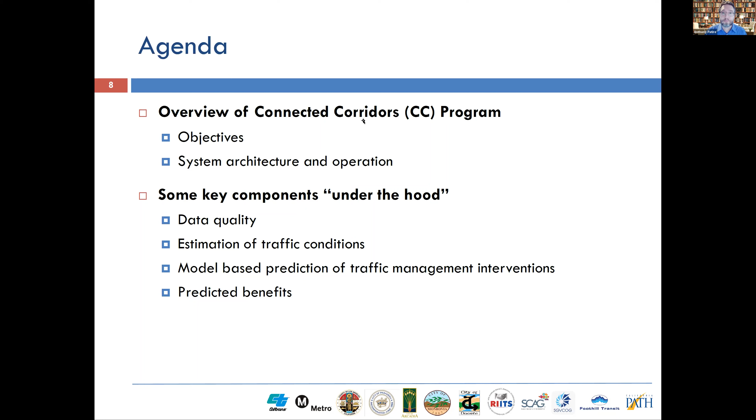Okay, so first let's have an overview. This is a satellite image of the LA basin. Now, unfortunately, we're not yet sophisticated enough to manage all of this traffic, so we're focusing just on the network shown in blue.

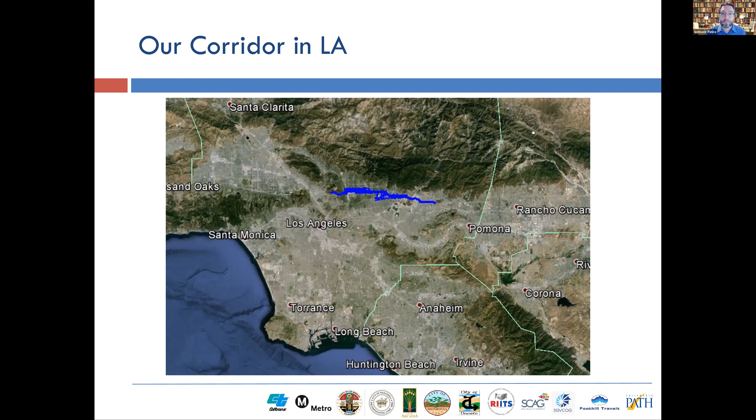If I zoom in, our corridor extends about 16 miles east and west, and about 4 miles north and south. It includes the cities of Pasadena, Arcadia, Monrovia, and Duarte. The supporting arterials, drawn in thick colors, are in play to help support freeway operations.

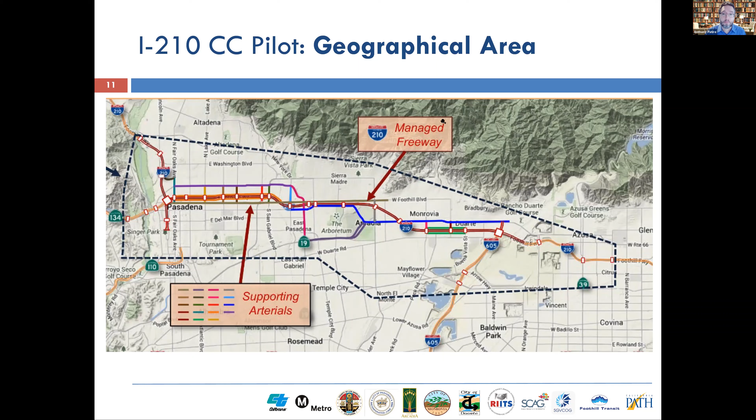So, a few key objectives. Of course, we need to bring together our corridor stakeholders to create an environment for mutual cooperation and collaboration. We're developing and piloting an advanced ICM IT system for use by Caltrans and local stakeholders to manage their corridor.

Our sincere hope is that this is something that will be replicable, and that what we're building is useful enough that it can be fanned out across other corridors. We hope to demonstrate project effectiveness that will lead to more opportunities to try out more advanced tools and more capabilities.

And the last bullet I put in a different color, because really I'm going to be focusing here on increasing capacity on arterial reroutes during freeway incidents. Our initial focus is not dealing with recurrent traffic, but only freeway incidents, and modifying signal plans, ramp metering plans, and route messaging on the fly.

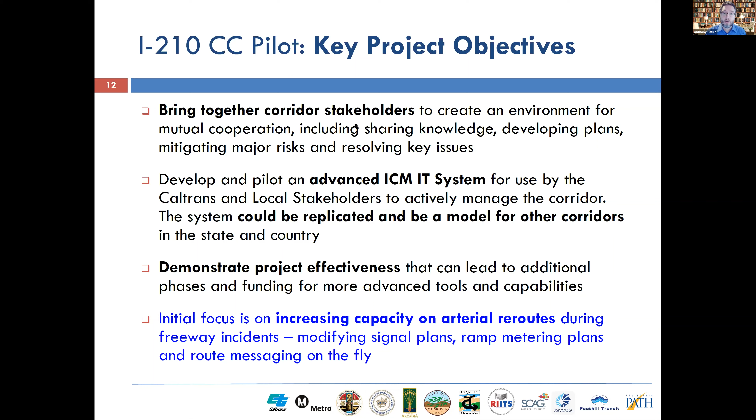So you always need a good motivation slide. In this traffic accident in 2014, one big rig ended up in the Gold Line transit tracks that run in the median of the freeway on our corridor. This incident is now memorialized in Google Earth as a bad day for commuters and a glorious day for traffic researchers who can now obtain a direct measurement of freeway jam density.

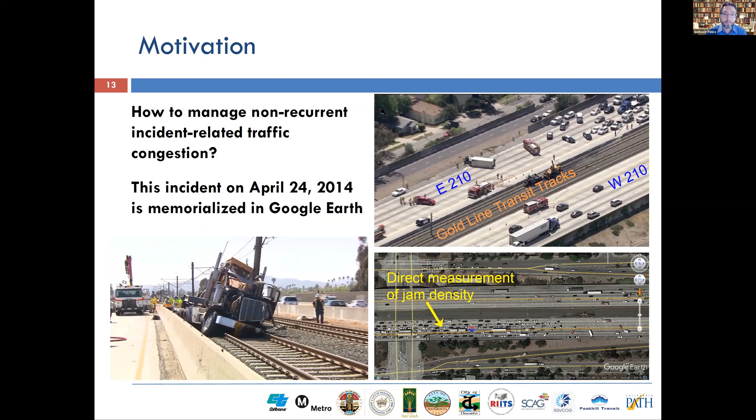Sensationally disruptive events happen from year to year on the I-210 corridor. For example, a big rig ends up blocking the Gold Line rail about once every two years. The picture in the upper right shows a complete freeway shutdown resulting from a suspicious package that was discarded from the transit terminal and landed on the HOV lane. They had to send out a robot to go check it out and make sure that it wasn't a bomb.

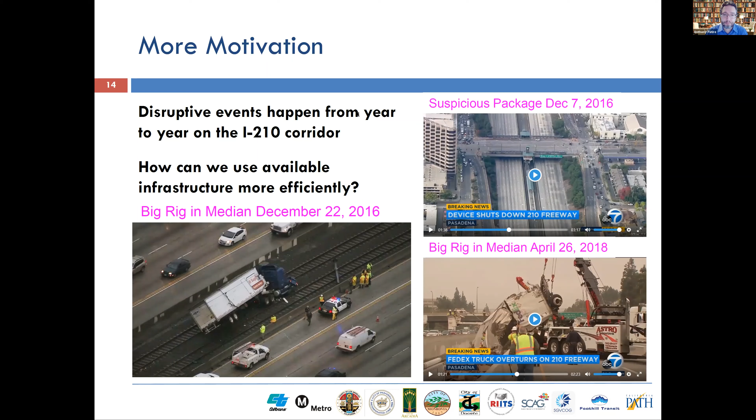So this slide is a cartoon depicting some ideas of how one might manage an incident. The concept is to adjust traffic signal plans and to provide extra capacity on a parallel arterial or two to help address some of the demand that cannot be served by the freeway when it's blocked. As you can imagine, this is a great example of a cyber physical system. You have people, you have infrastructure, you have the technology that's trying to help make some good decisions to manage the system more effectively.

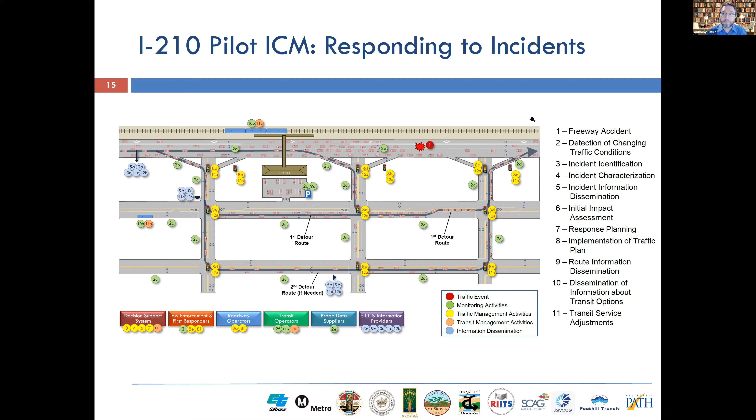So for the response plans that we're considering in this corridor, they can involve a number of different elements. It can include the reroute itself, information dissemination via changeable message signs or trailblazer signs along the routes, intersection signal control request, adjusting the cycle duration and offset of the signal to provide additional green time to preferred movement, and also ramp meter control requests to prioritize vehicles entering the freeway at the end of a reroute.

Or maybe if this is an incident happening 2 a.m. on a weekend, no fatalities, no chemical spill, nothing crazy - well, lucky day - maybe there's no need for a detour. It's just that the management agency should do what it normally does and send out a team to clear the incident.

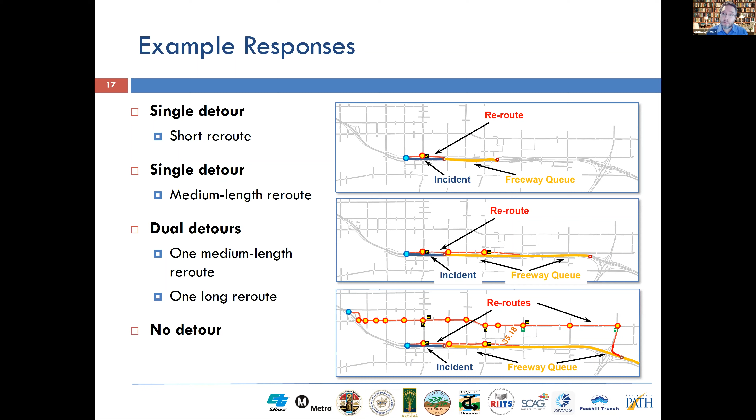Okay, so I'm going to talk a little bit about the system architecture that we're building to help manage this cyber-physical system.

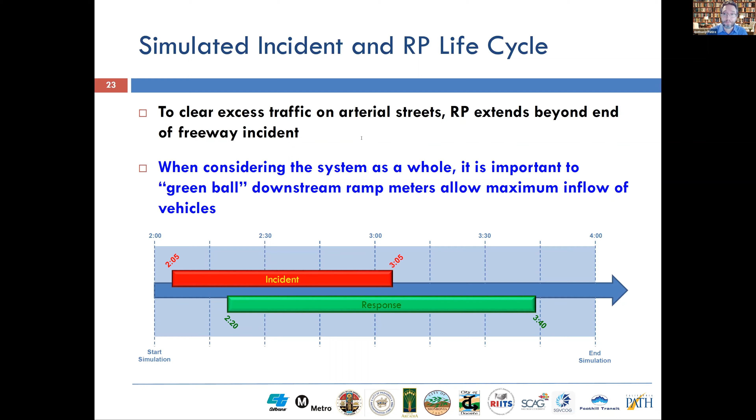So the decision-making process looks like this. Plans are pre-scored based on traffic engineering judgment, the results of simulation studies, and stakeholder preferences. In addition, the rules take into consideration the incident attributes, for example, the location, the time of day, the number of lanes blocked, the historical demand and the queue forecast, asset availability, for example, can I even control that signalized intersection, or is communication down?

Estimation results for the queue length and initial state, and the prediction scorecard. I'll explain about some of these things later. If there's a data outage, then estimation and prediction become impossible, and all that you can do is rely on your pre-scored plans. If there's some kind of communications outage, it could be that you have no assets to control, and you can't even deploy a response plan.

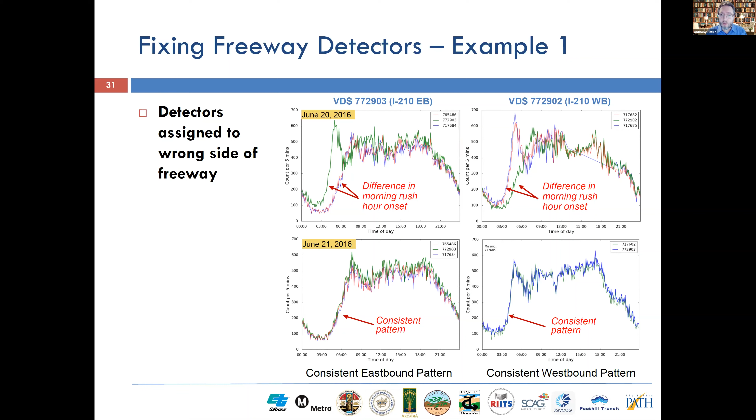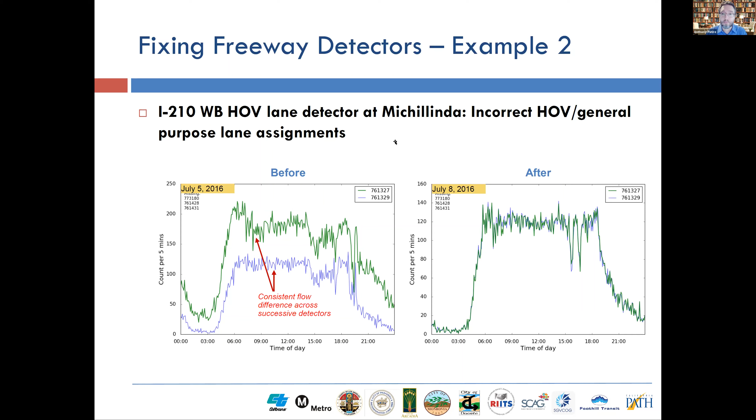During the IP conversion, what would happen is that these green sensors would go dark, and then sometime later they would light up in orange. At first I doubted our own dashboard - I'm like, really, this can't possibly be right. We fixed the configuration data, but why should this change? They're just updating the communications. But when we examined the data, it turned out that the configuration needed to be fixed again.

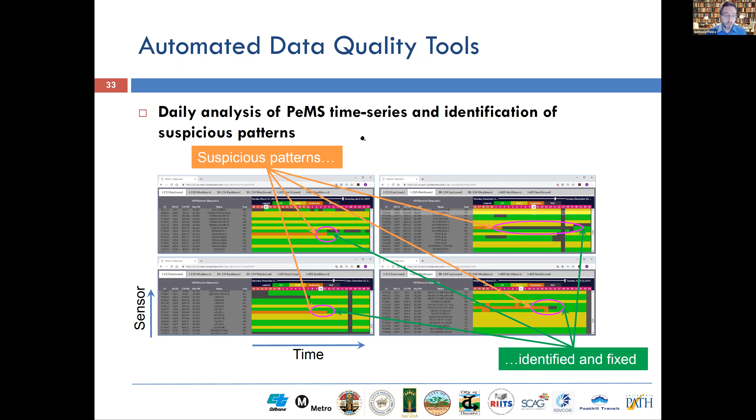So there's some lessons learned about data. I've seen graduate students waste a great deal of time taking the data as given, and it sort of doesn't quite work out with the math. I think it's really crucial to think critically about the data in addition to thinking rigorously. You can't just take the data as a given. In a live system, sensors can come and go underneath your feet. Don't underestimate the utility of automated tools and dashboards to check configuration, information, and data quality. In an increasingly data-driven world, methods for handling missing and erroneous data will only become more important. One thing that we've worked on, which is really fun, is looking at some of the patterns that we found in HOV data and different types of data, and trying to apply that more broadly.

I want to attribute this work to Kijun Gan. This work is an important part of connected corridors because it fulfills a critical function. For detailed questions, I'll refer you to the report, but I just want to provide an overview of how we're estimating arterial traffic.

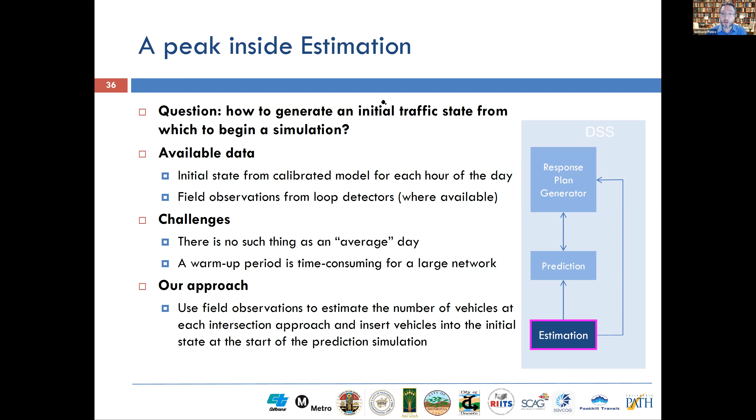Regime 1 is the uncongested regime. Regime 2 is congestion but with no downstream spillback. And Regime 3 is congestion with spillback.

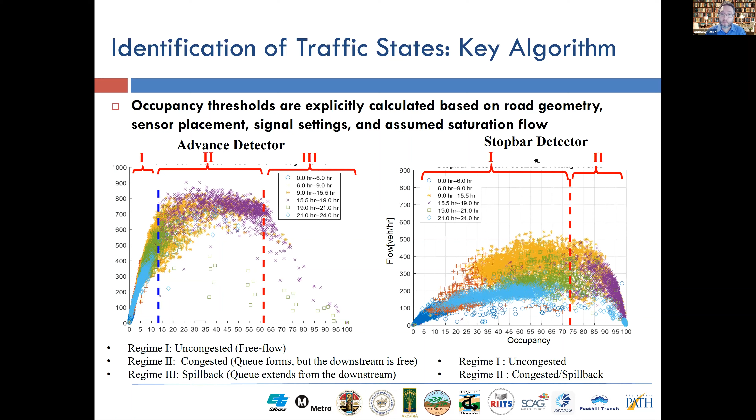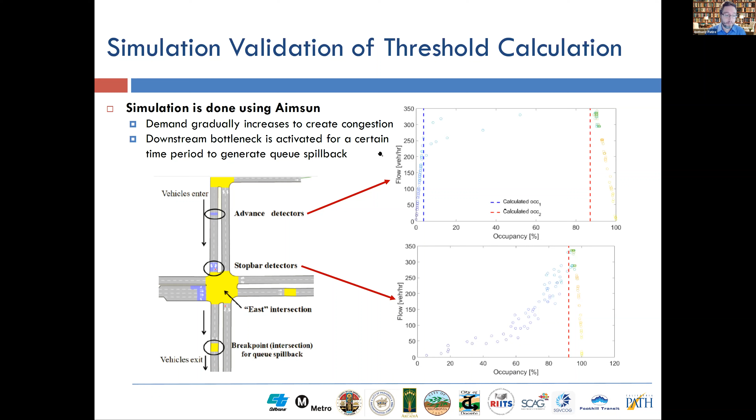It was necessary to validate the queue estimates in real life, and it turns out there's a linear relationship between travel time and total queue along an arterial in the congested regime. The picture at the bottom shows the test site on our corridor where both Bluetooth travel time and loop data were available for comparison, and luckily, in the afternoon and morning peaks, it's in congestion, so we were able to test this out.

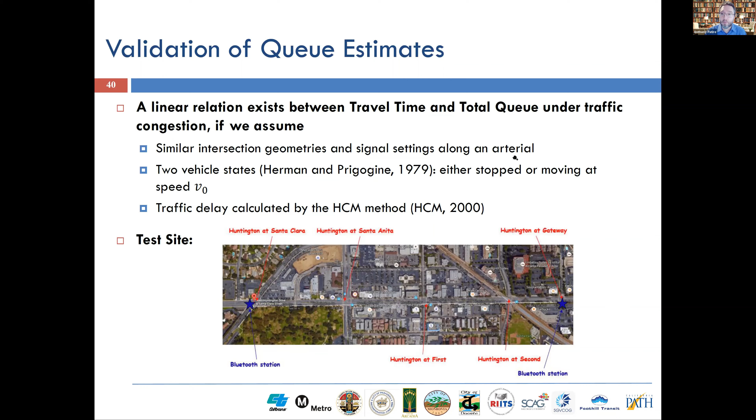This slide shows a part of the Aimsun network in the lower left, and on the upper right, a zoomed-in portion of the network in which vehicles generated from field detector measurements are inserted into the initial state.

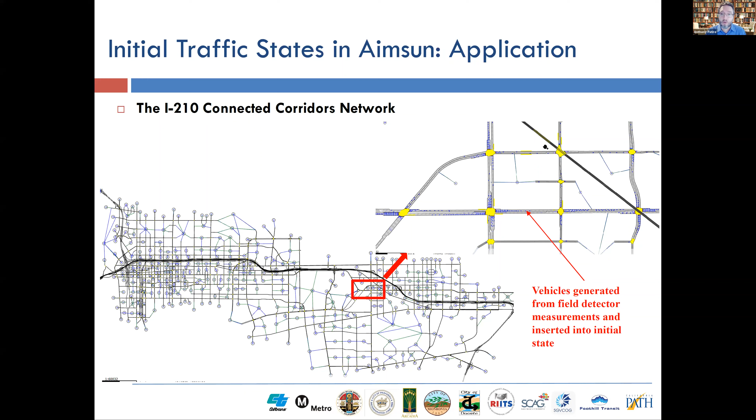Now there's one last piece of information you're probably wondering about: if we insert vehicles into a microsimulation, how do we give them destinations? That's really important. From simulation of the calibrated model, we obtain a destination distribution for each time period and day type at each intersection approach. This has limitations and we're working to improve it, but it gives us a starting point.

Given that destination distribution and the sensor data, we determine the number of vehicles in each queue at each intersection approach. We assign an appropriate destination based on that distribution, and then assign the vehicles from downstream to upstream. When a dedicated lane is full, say for a left turn, vehicles are assigned to adjacent lanes.

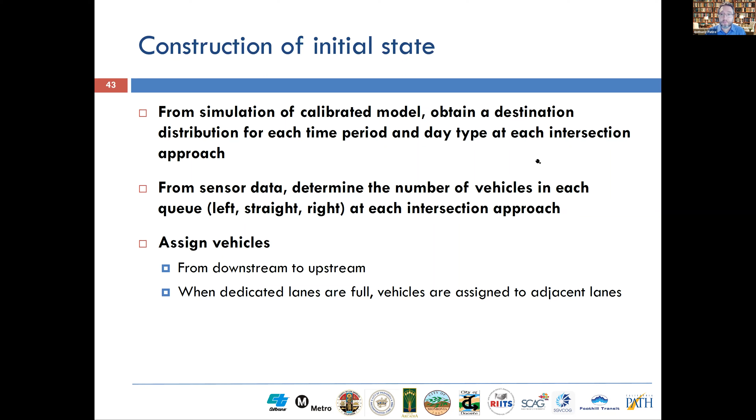Okay, so this is my third topic. I'm going to talk a little bit about prediction.

Okay, so first let's just take a step back and talk about modeling. What's the purpose of a model?

At the beginning of this Connected Corridors project, we needed to understand how to manage incidents on the I-210 corridor. We needed to take into account short-term traveler responses, such as en route diversion, triggered by unusual congestion or information dissemination. We use the model to help guide assembly and selection of appropriate response plans, try out different control parameters for the signal plans, and see if these things work.

It was really important to be able to use the model to communicate with stakeholders about what they thought was going to work or what wasn't going to work, and whether they believe that we're understanding the problems on the corridor.

So what's the purpose of the model in real time? We're trying to do some kind of model predictive control where we're able to forecast the possible evolution of the incident under different control scenarios, to facilitate computation of a performance scorecard. I'll talk more about the scorecard later. We need to provide enough fidelity to decide among available options.

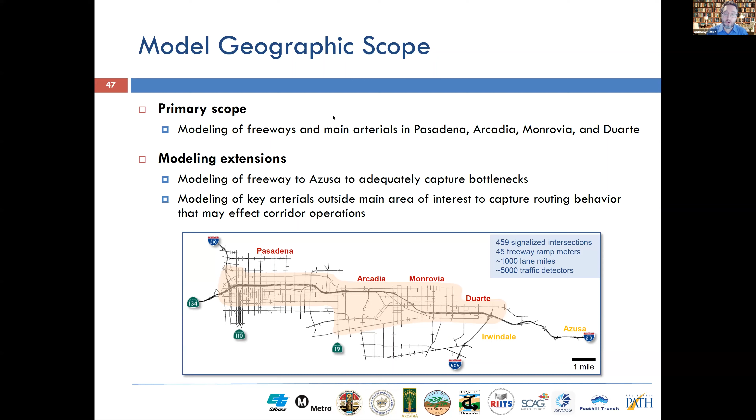The model extends beyond the main corridor that's being managed, because we needed to accurately capture some bottlenecks outside of that area. We also needed to model some key arterials outside of the main area of interest to capture routing behavior that may affect corridor operations.

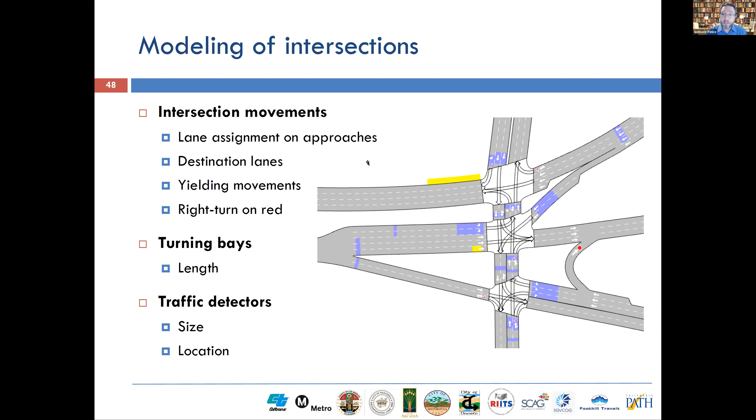We model some complicated intersections in great detail. We programmed in all of the signal timing plans for 24/7 operation. One of the things that pushed us toward microsimulation was the operation of the corridor. 98% of these intersections are actuated, and these actuations impact the minimum green and the extension of the green phase, so we really wanted to make sure we were able to model that.

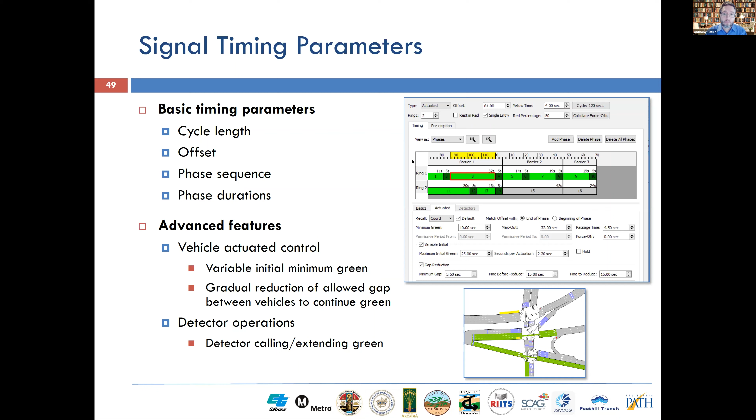This is actually a really interesting discussion - why choose microsimulation over flow-based or meso models or other types of models out there? For the controls within our toolbox, the intersection and signal ramp meter changes are the key components of the response plans, and that's how we're able to provide additional capacity for needed movements.

The intersection signal behavior depends on these vehicle actuations, and the microsimulation directly models these actuations. Changes in routing behavior resulting from the incident and from the response plan are key factors in the predicted outcome. You have to calibrate an OD matrix, which is a lot of work, but having this OD-based model helps you evaluate these routing impacts.

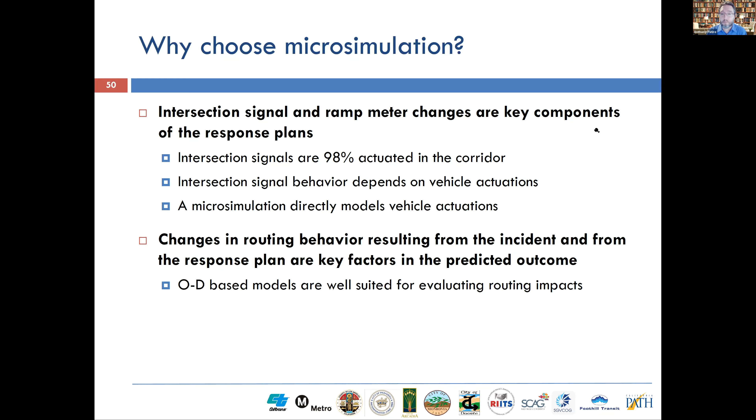Okay, so I want to get under the hood a little bit and give you a show and tell of the analysis that the DSS performs behind the scenes. We're going to talk about what's happening in some of these green areas between the response plan generator and the prediction.

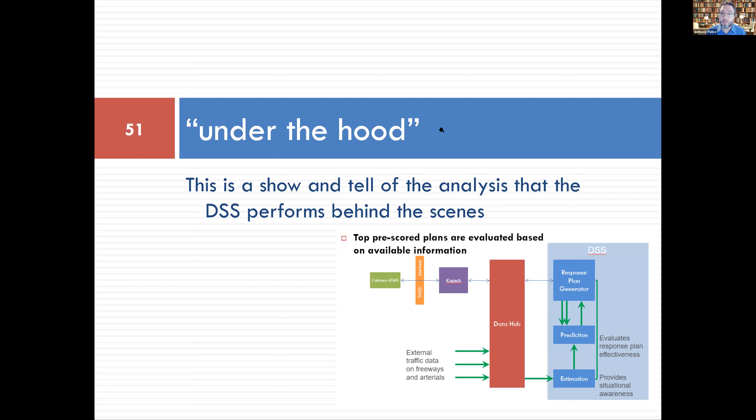So here's an incident that we can imagine where 3 right lanes are blocked on the westbound direction of the corridor.

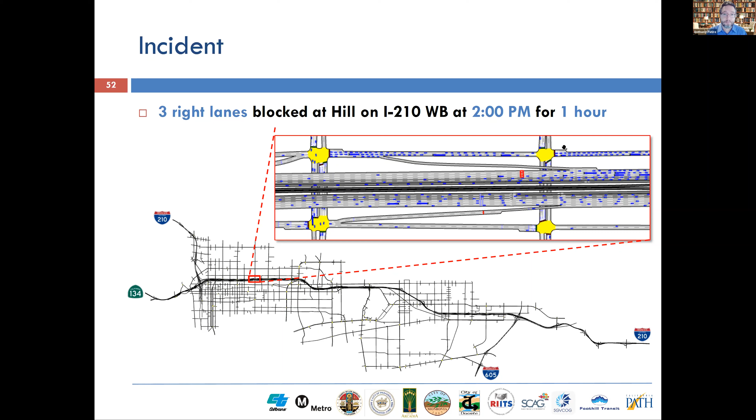Plan B would be a moderate response where we extend the cycle duration to 120 seconds to provide additional capacity for rerouted traffic. Plan C is more aggressive, with a 135 second cycle duration to allow even more vehicles to reroute. So how do you decide what's best?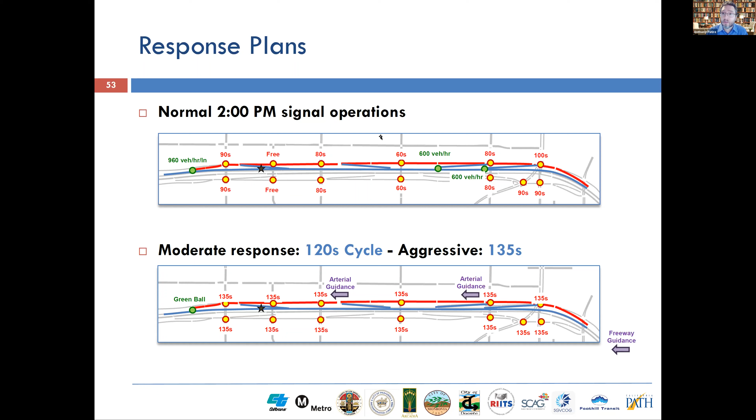We had a lot of discussion about just what to measure and how to make a good decision. One metric involves flows and screen lines. We look at the upstream off-ramps and downstream on-ramps. We also divide the corridor vertically with a screen line, and we want to see if we get more vehicles across the screen line—then maybe we're doing something good.

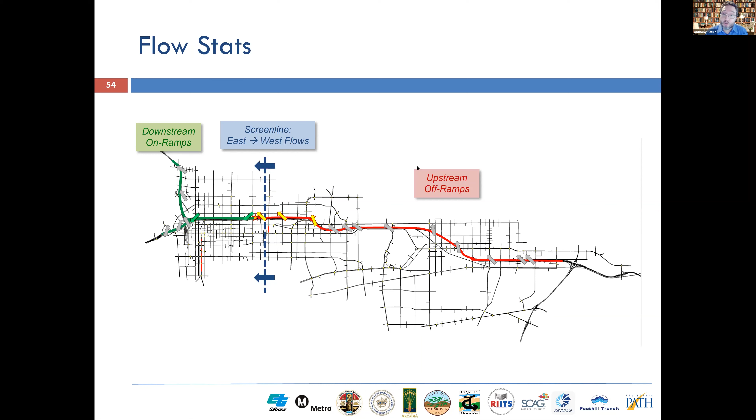In addition, we consider area statistics. If you look at the entire corridor, the entire model all at once, operational changes in one specific location tend to get washed out. So we divided the corridor into zones.

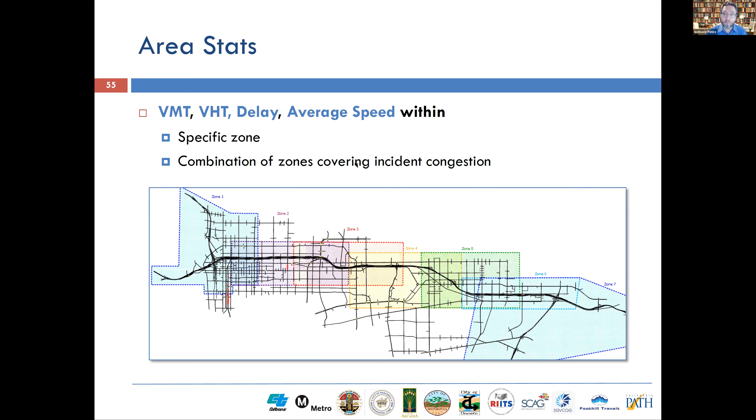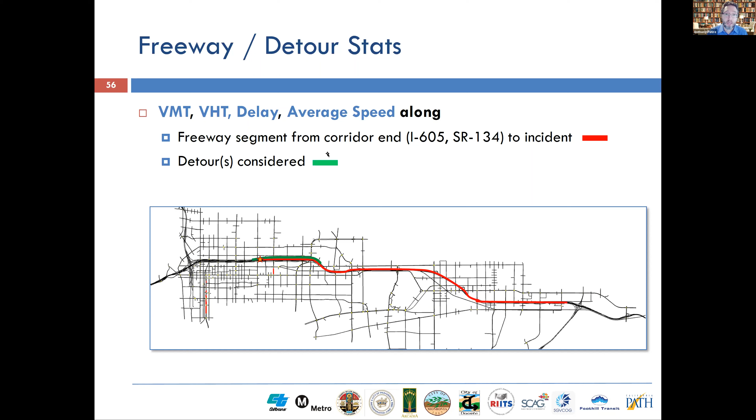In addition, we look at statistics on specific routes and detours, so we look at the freeway segment from the corridor end to the incident and the detour under consideration. Finally, we also keep track of the average and max queue, deciding what's a queue and what's not by choosing a 15-mile-an-hour threshold.

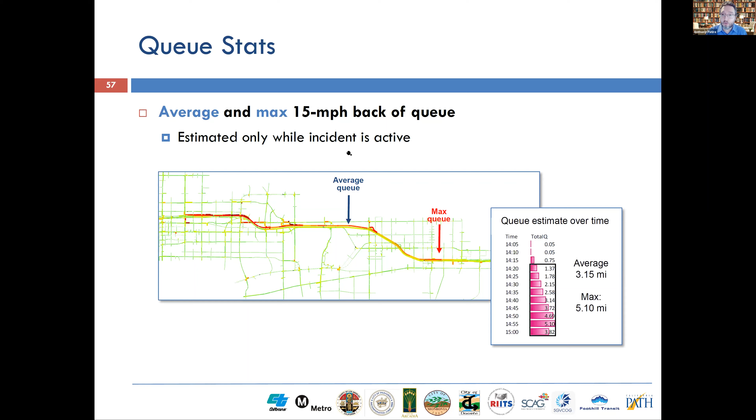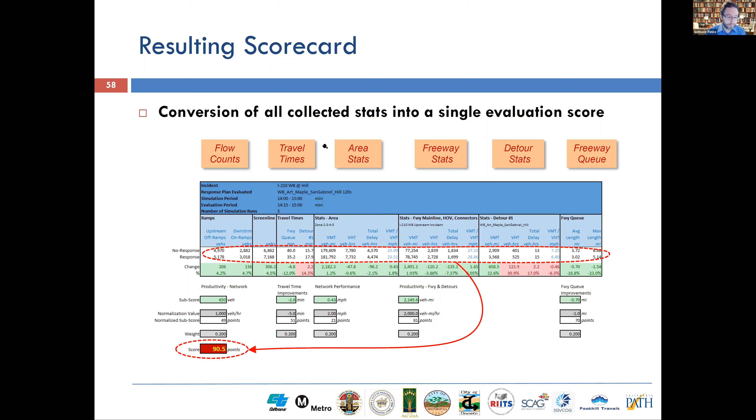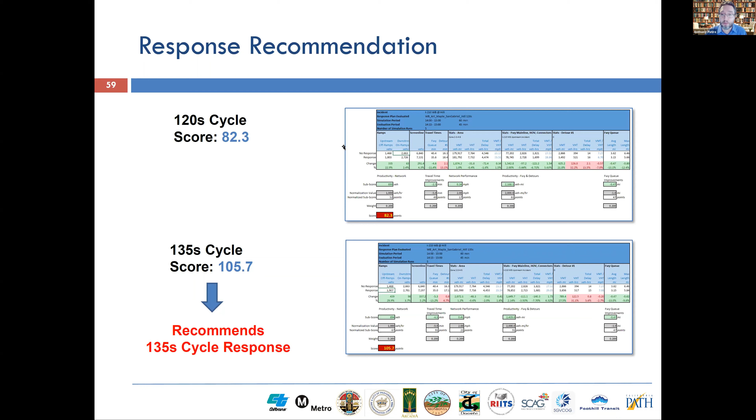So in this example, let's say for the 120-second cycle plan you get a score of 82. For the 135 cycle plan, you get a score of 105. Then the response plan generator would rank these plans appropriately and make the recommendation for the 135 cycle response plan.

Hopefully we're doing pretty well on time. I think this is my last topic, predicted benefits. I want to attribute this work to Francois Dion, who performed thousands of simulations on this corridor. At a number of times we've looked at the frequency of incidents on this corridor, and you've seen some sensational examples. For this study, we looked at the frequency of incidents over one direction of the freeway over 6 months, and the results were extrapolated over 1 year and for both directions. This resulted in 548 potential activations of the system per year, which goes to show that our corridor is truly action-packed.

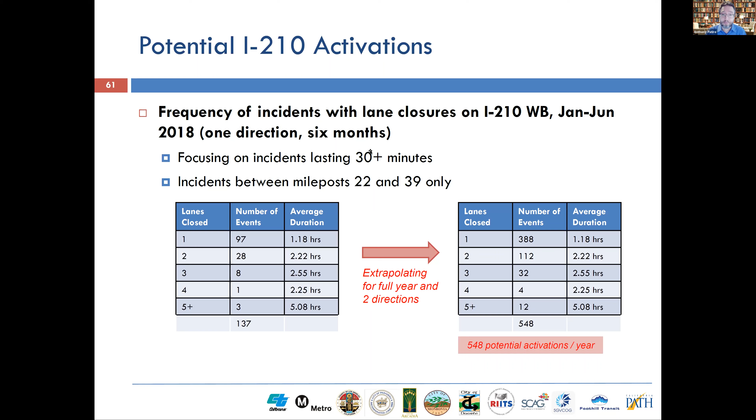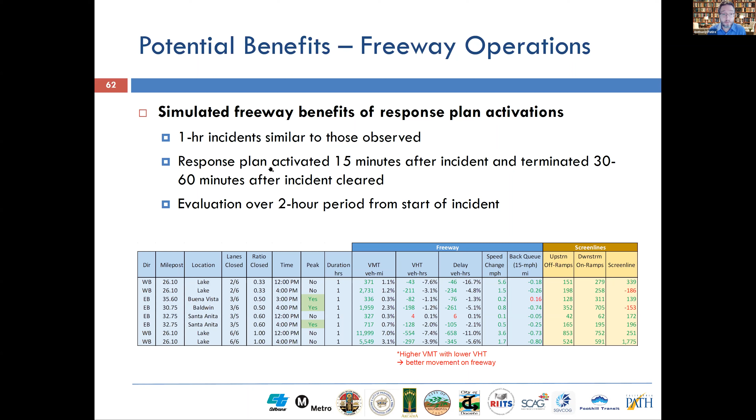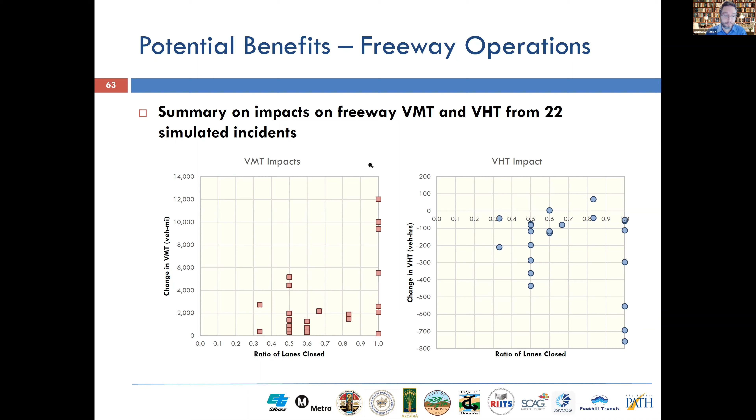So from the distribution of results, looking at the low end, the yearly benefits look to be around $3 million a year. This is by using a value of time for VHT for autos and trucks. This does not include potential savings resulting from fuel, reliability, or vehicles using more efficient detours. This is just a straight up VHT calculation.

On the high end, the yearly benefits look more like $5 million per year. I always like to end on a positive note, so I'll end my presentation here, and I would love to hear your questions and comments.